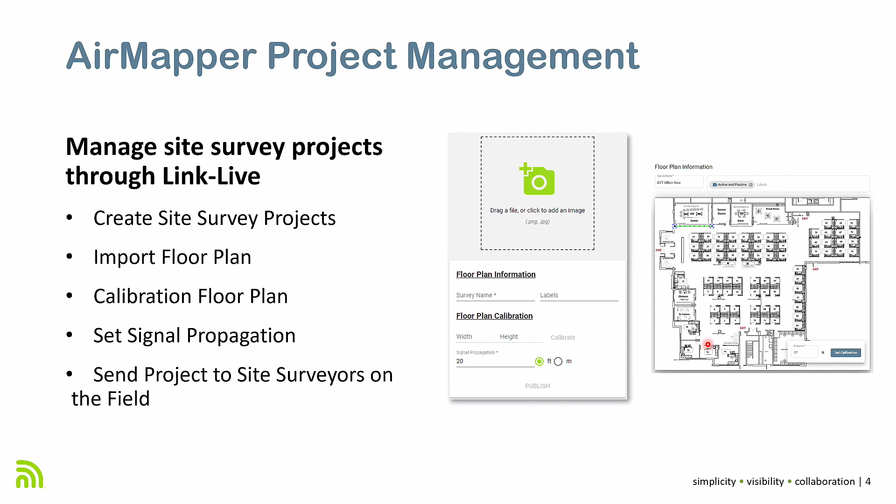The person on the field just needs to walk around and tap on the screen. So we've simplified that workflow to make it easier for everyone to collaborate. I'll show you how this looks in a few moments and how it works.

Another thing we introduced more recently, and I think some of you may already know about it, is that on May 12th we introduced the first integrated Bluetooth/BLE site survey solution on the EtherScope. So now, not only can you do active or passive Wi-Fi site surveys with your EtherScope NXG, which has two Wi-Fi radios, you can also do a Bluetooth or BLE site survey in parallel or at the same time.

The way it works is pretty straightforward, guys. Just turn on the Bluetooth radio on your EtherScope, and I'll show you how to do that in a few moments during the live demo. The idea is that now in parallel, where you're doing your Wi-Fi active, Wi-Fi passive, or a dual survey with both radios at the same time, you can also perform a Bluetooth or BLE site survey. The process is very similar, basically identical to what you'd do with the Wi-Fi site survey, but of course instead of collecting Wi-Fi data, you're collecting Bluetooth data.

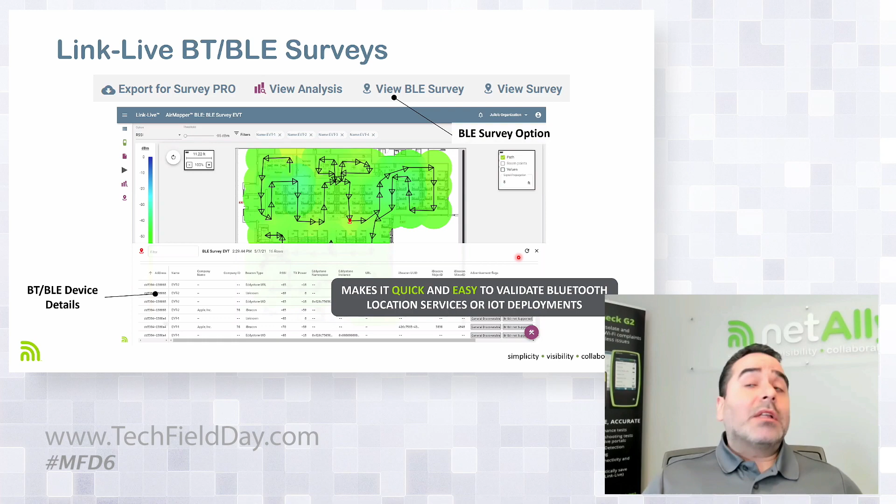The idea is to do more on the same walkthrough. Then you upload that data to Link Live, and I'll show you how that looks to do your analysis. It will be very similar to what you'd do with a Wi-Fi site survey. You have multiple filtering options, and you'll be able to see details about all the BLE or Bluetooth devices in the area. Notice that one of the bigger differences is that instead of Wi-Fi information, you'll see Bluetooth information.

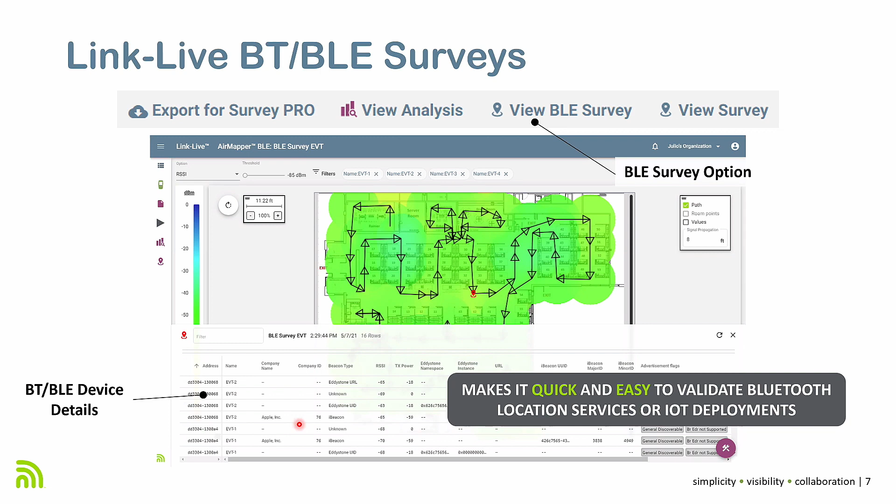All that is cool, and I know you guys will be like, okay, that's all nice stuff, stuff that was introduced a couple of months ago. But what's next? What's the new stuff that got introduced like yesterday?

Well, there's a few enhancements that we introduced, mostly on the Link Live side of things for AirMapper. As I mentioned, this was just introduced yesterday, so you can log in right now. Well, maybe not right now, I'm hoping you're paying attention to this session. But after this session, you can log in and check them out. Basically, we've done a few things.

Number one, we improved the performance of generating both heat maps and reports. As more people started using Link Live to generate heat maps from their AirMapper site surveys, we noticed that it wasn't only small projects with a few data points.

There were sometimes these giant warehouses with thousands of data points, and generating the heat maps may not have been the fastest. So we paid attention to what our customers asked, and we've improved the performance of generating heat maps. If I remember correctly, it's about 3 times faster than it used to be, and over time we'll continue to make more improvements to that.

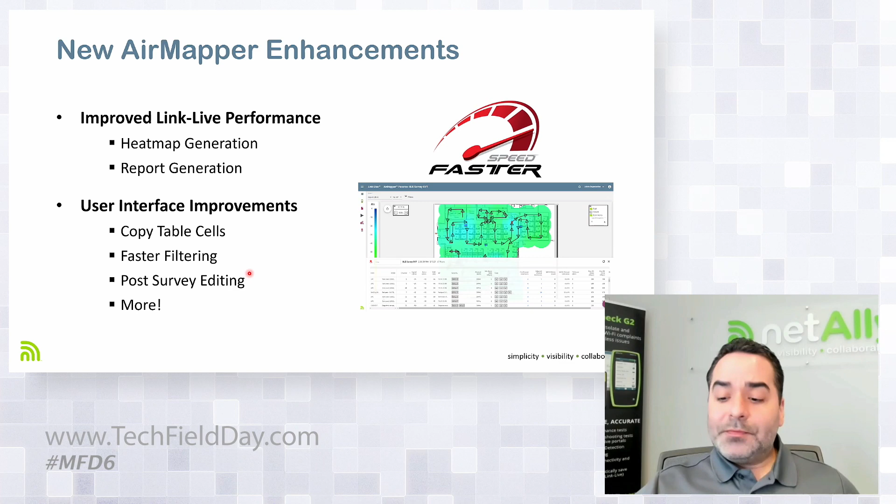And talking about demo, it's about that time. So instead of going through a lot of slideware, let's do the live thing and see how it really looks. Okay, let's start on the screen here.

I'm sure all of you are familiar with this part. This is Link Live. This is where you will do your analysis for the site survey data and where you can create new site survey projects. Let me show you how to create a new survey project, to make it pretty simple.

First, from the AirMapper section on the left side of the screen, go to the lower right and you'll see a little purple icon with a plus sign. Just click on it. From here, the first option is to manage floor plans, which will take you to a section where you can create a new survey. So if I go to the lower right to create a new floor plan...

Then in here I can do, for example, something like that. And I can add a label if I wanted to make it easier to find. Then I can just drag and drop a floor plan, let's say something like this.

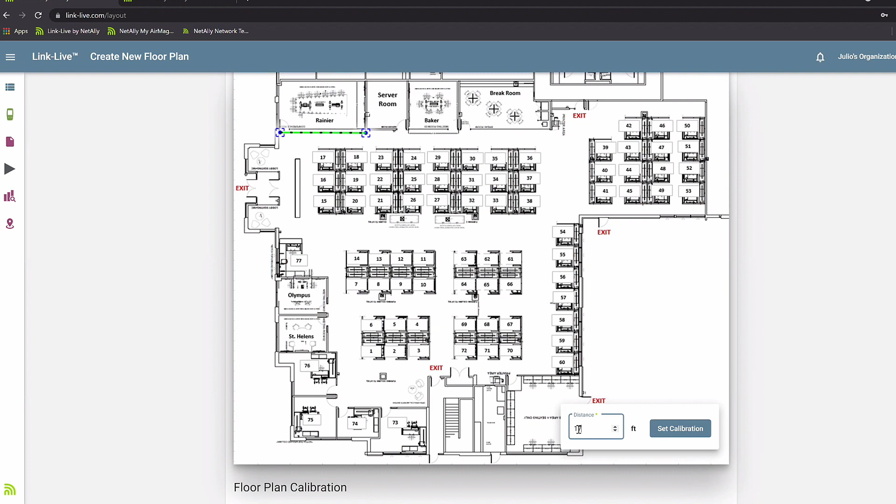So now I have my floor plan here, and I want to calibrate it. Notice that if you know the width and height, you can just enter those, but for most people it's easier to just do the calibration. Let's say I know the distance from here to around here—let's try again, there you go. Then I know that this is about 17 feet, if I remember correctly. Do a set calibration, and now I have my width and height.

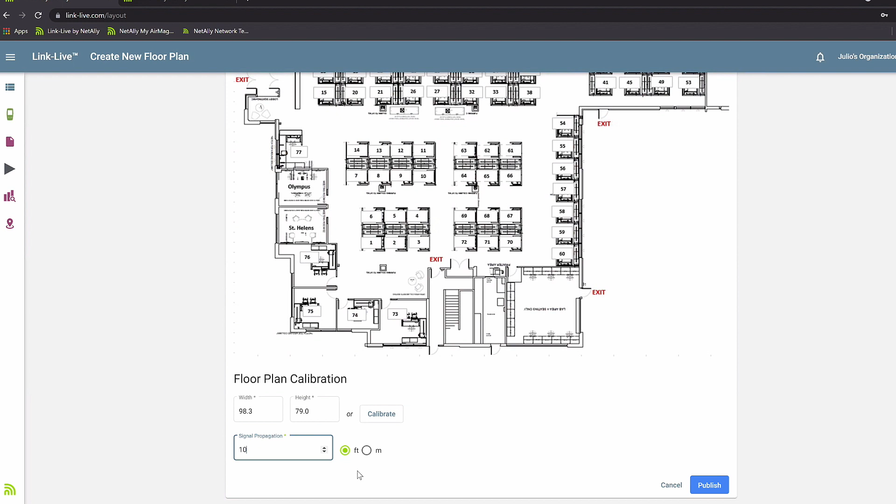As for signal propagation, as you guys know, this is very important to accurately perform a survey. Let's say for this case I want to use 10 feet—of course you can change between feet and meters, and in this case I'll leave it as feet. Then do publish.

And now, when you go back, what are the options on the map, sir? What files can you take for your maps—is it just PNG? Currently PNG and JPEG.

I'm sorry, did you say drawing files? Yep, so let's go. PNG and JPEG.

Any plans on adding CAD support or anything like it? That's a great question. We are always adding new formats, and CAD is one of those that we plan to add in the future. Thank you. Yeah, sure, no problem. Great question.

Now that your project has been created, you'll see it here on the list of site survey projects. And you have the option of sending it to multiple units or all your units.

For example, let's say that you have this big warehouse. Sure, you could do a site survey by yourself, but it may take a few days. So instead of doing that, you have like 3 coworkers with you, and each one will do a section of the warehouse. You can send the same project to all their units or specific units if you have more, and each one can go and do a section of the warehouse. Then when they're done, upload those results back, and you can merge them into a single project.

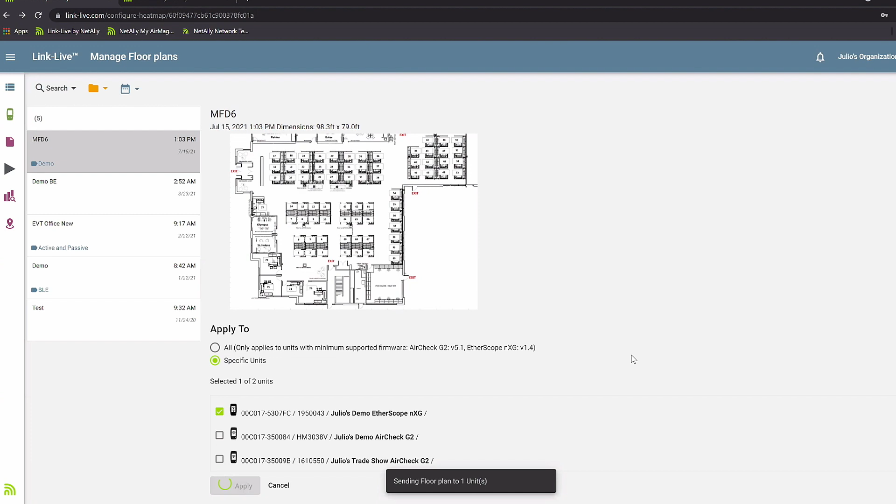Yeah, I've got a quick question. Yeah, sure. Obviously, at the moment, this is just a single floor. Are there any plans to have buildings with multiple floors?

Good question. So we get that request a lot. Currently, you can do that through the AirMagnet software. You could, for example, download your AirMapper project and open it on AirMagnet and use the multi-floor functionality there. As for the cloud, it is something I hope we'll be adding also in the future. So it's on the list as we make more and more enhancements to the cloud.

One thing some of you guys that have had experience with the AirMagnet software in the past may notice is that over time, almost on a monthly basis, we keep transferring little functionality that people are used to because of the AirMagnet software, and we'll be slowly making it to Link Live also. So as time goes, you'll see more of that functionality, like the multi-floor, making it to the cloud too.

Okie doke. So now that I already sent my project to my EtherScope, let's go to the EtherScope side of things. As you guys know, or may know, I'm using Link Live to remotely connect into my EtherScope.

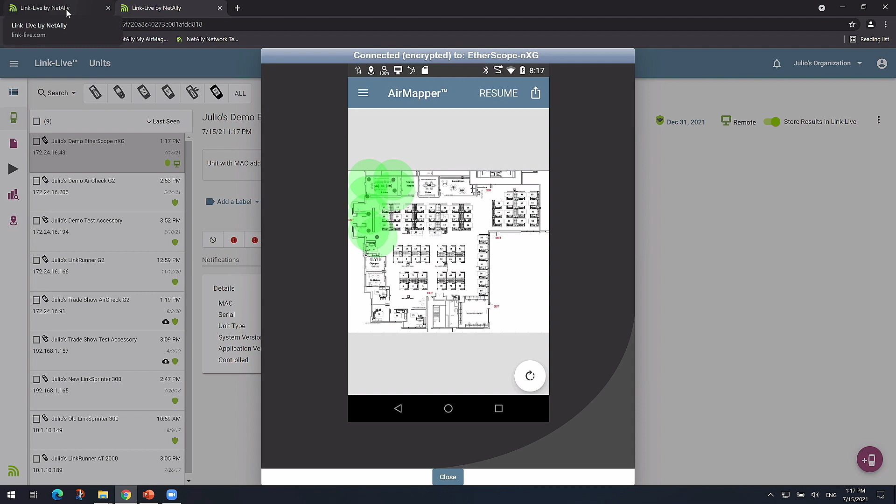Okie doke, so now that I uploaded this to Link Live, let's go back to Link Live. And again, I like highlighting this, but using the little tabs is pretty useful because you can have multiple screens going to Link Live. And if you have multiple monitors, you can have one tab on one monitor, another tab on another monitor, and it makes it easier to analyze data going back and forth.

So anyway, if I go back to my AirMapper screen, we'll see my project here. And this one doesn't have a lot of information, so I'll switch to this other project I got here that has more data. And from here, you have a few options - you have the option of just exporting.

Notice one difference for those that have been using AirMapper already: with the update we did yesterday, we basically changed the order of the options a little. We also clarified some of them. For example, in the past, instead of Wi-Fi survey, I think it just said survey by itself, and it was confusing because you had BLE survey and just survey. So now you have a BLE survey, Wi-Fi survey, and the option to export.

And notice the option to export can be used in two different ways: one, to export the data into AirMagnet Survey Pro to do analysis locally, or to export the data and share it with someone else. That's one of the cool things about Link Live being free and not being tied to support nor anything - if you have a customer who wants access to the project and wants to do their own analysis, maybe generate their own reports, instead of having them buy a software license to do analysis, or download a viewer, they just create a free Link Live account.

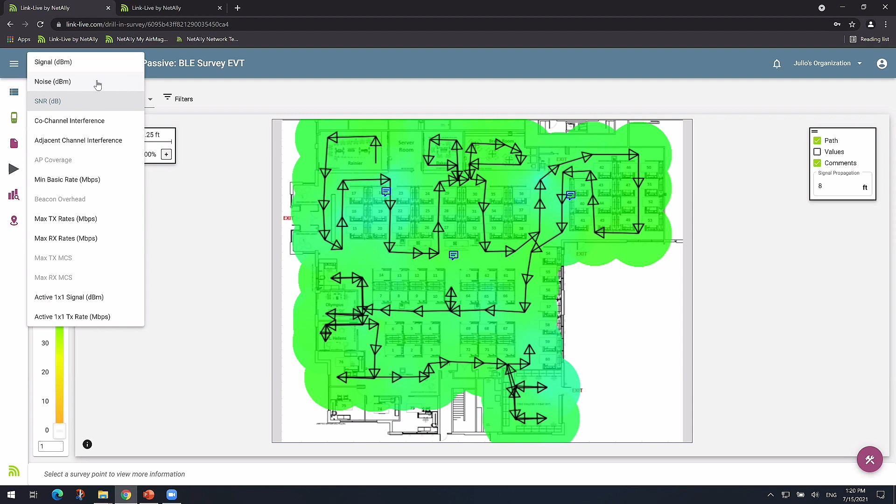How are you getting the SNR, sir? Are you assuming a static noise floor? No, we measure both the signal and the noise, and then calculate the SNR. So you have the option of looking at signal, it's measured, and the noise levels, which are also measured. The Wi-Fi radio on the EtherScope is different from, for example, USB dongles or the Wi-Fi radio inside a laptop, it has the ability of measuring noise. We use that to calculate the SNR. So it's actual measured noise, not a predicted value or something like that.

Thank you. Sure, then going to some of the enhancements we've done. Basically, let's say I want to select that area there. Besides the UI looking a little better, like I mentioned earlier, you have the option of just copying and pasting. So if you want to copy the data on the table, you can do that.

You also have the option of moving things around. So let's say I care more about SNR than noise, I can swap options in there. Or let's say you want to keep the security information always available so you can see it, you can do something like this. Now when you go back and forth, that part won't move. They're like little things, but they make it easier to analyze or go through the data. A little customization options, you would say, that make it easier.

Also, notice, and we added this not so long ago, you have the option of just adding comments directly. You'll notice this little icon here, the little i, it tells you, hey, do control click to add new comments. So now if you wanted to add a new comment here, you can do that too. So not only can you add comments from the unit and then see those here, but you can also add comments here directly, or you can just edit the comment that was done in the field. So if you notice a typo and you're like, I don't want to show that on a report, you can edit and fix that comment, or you can just remove comments and delete them too if you want. Little things that make your life easier while analyzing the data.

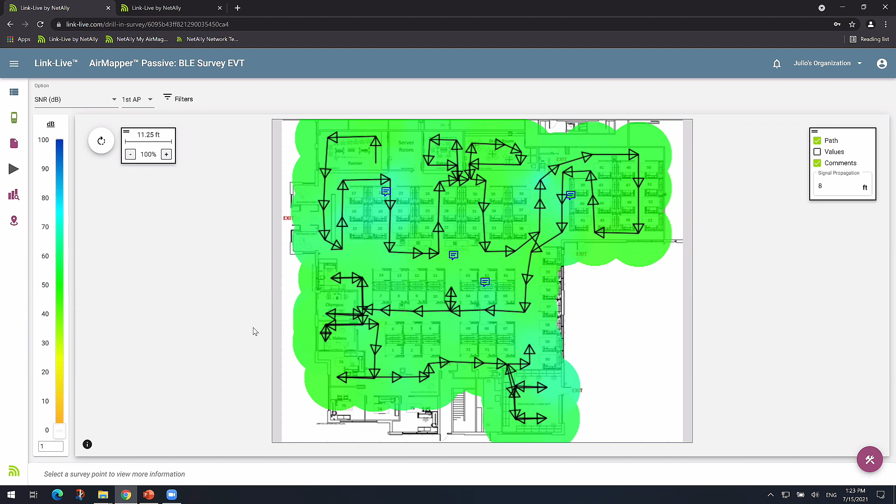Okay, moving on. So those are some of the enhancements we've done. Then the other part, of course, is the Bluetooth survey. So I did both my Wi-Fi active and passive, that will show up under the Wi-Fi survey data. Let's look at a better example here, this one. But at the same time, or in parallel, you can also do the Bluetooth survey.

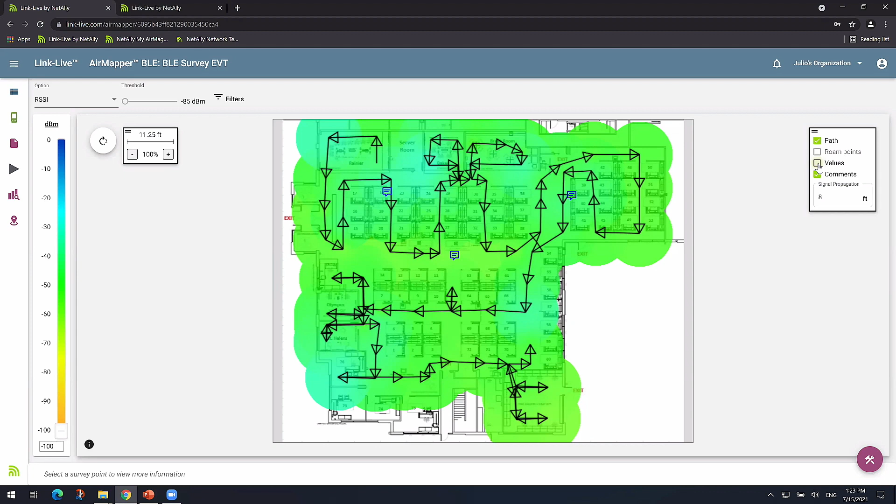When you look at it the first time, it looks very similar to a Wi-Fi survey. You have the option of looking at the path, adding comments, just highlighting the values. But then when you start looking at the details, you'll notice that the information included is not Wi-Fi related. For example, you'll see address information, or beacon names, you also see beacon types, for example Eddystone, which is what Android devices use, or you can see iBeacon. There are other types that will show up as unknown, but are also visible. So basically what we do is not only see that Bluetooth or BLE beacon in the air and measure the RSSI or the signal for it, but we also parse through that beacon and extract a lot of the data that's available on it.

And the importance here is that, let's say, for example, you're using Bluetooth or BLE beacons for location services. This may be better if I filter here. So let's filter pretty quickly and look at this. Let's say I only want to look at a couple of these, not that one, so I want to look at this one, this one, this one, and this one here. My mouse is getting a little crazy, so let's just use the tab here.

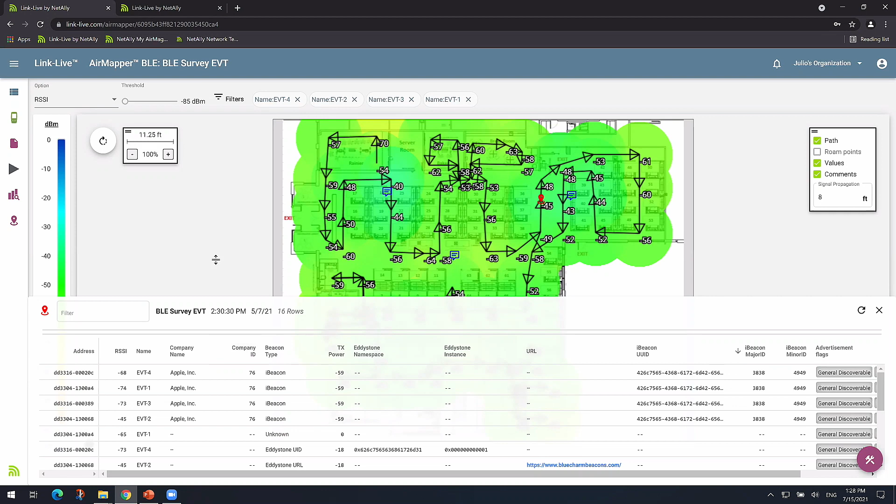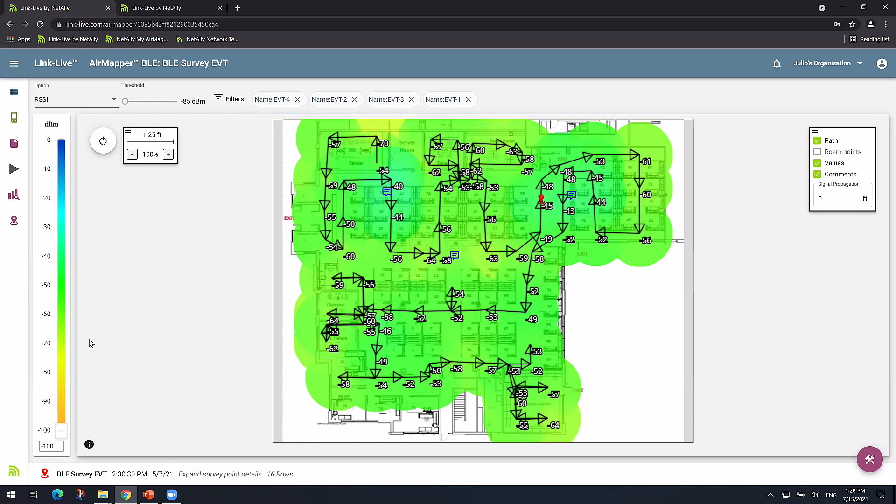Okie doke, so that's how the Bluetooth BLE part works, guys. You'll notice that if you wanted to find the location of the beacons, you can use the legend to gray out the weaker signals.

And just highlight the stronger ones, so you can see there's my 4 beacons in there, so you know where they are. Basically one on almost each corner of the building.

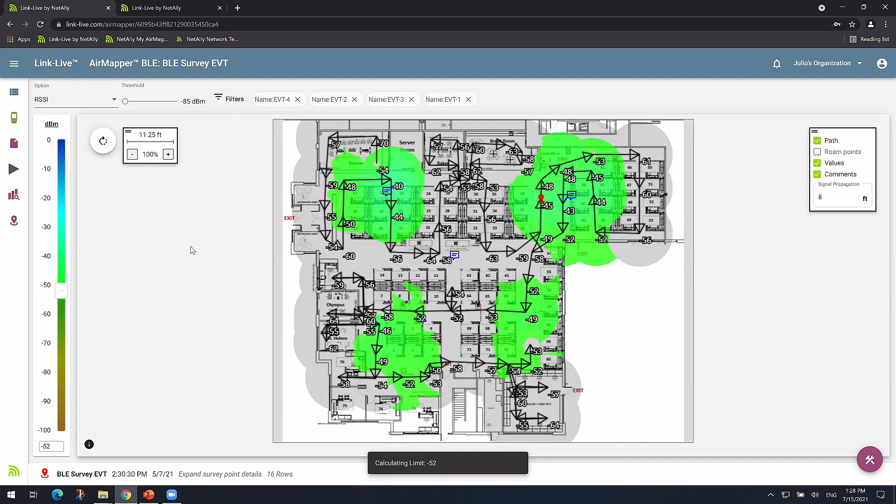So Julio, quick question for you on use cases. Would you see this feature being used by engineers that want to validate a new access point that is set up and has the BLE radios built in, or would you see this used more to locate client devices, making sure they're configured properly to operate with the system?

I would say all of the above. One, to validate the beacon or BLE configuration on the access points. If you're going to use those access points for location services, same as when you configure Wi-Fi, you want to validate it's been configured correctly, mostly with the location information. And if you're using other beacons to improve coverage on the site, then that's one use case.

Another use case could be for security: should there be any Bluetooth devices in this area, or should I only see X Bluetooth or BLE devices in the area? Am I detecting something that shouldn't be there, and where is it located at? Or you could also use it, as you mentioned, more for the client side of things and validate those. So technically there's multiple use cases, and if you guys come up with another idea, feel free to let us know. But basically, getting this type of visibility can be used in multiple ways.

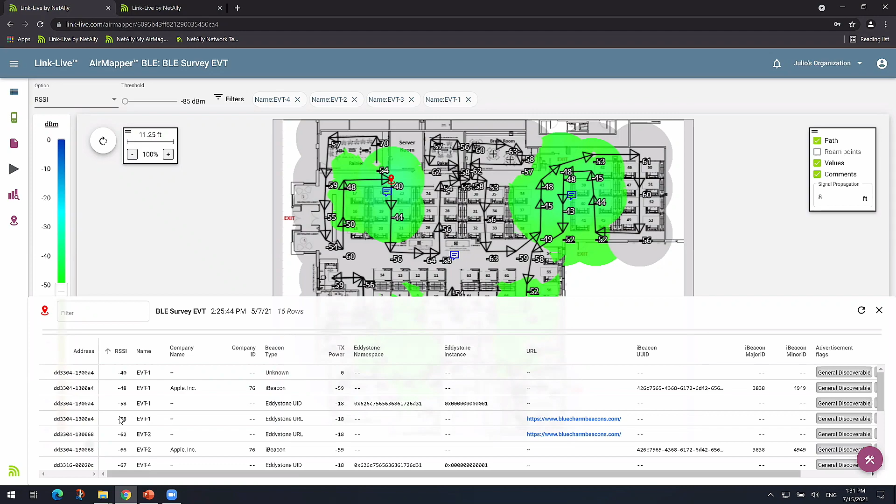I'm just wondering if you could heat map it, because let's say you're designing a BLE location system where you need to see at least 3 beacons from each location. You don't have to click every location, just see a map that shows grey where I haven't got 3, green when I have, or something like that. I'm just wondering if that's possible.

So let me see if I understood that. Can you repeat that again so I can think about it a little more? I guess what I'm getting is a heat map where I can see, let's say I have a requirement to be able to see 3 beacons in every location on the entire map. I want to know, is there any area where I can only see 2, or only 1? Because that'll affect my location.

Yeah, I see what you're saying. That's very similar to what we do on the Wi-Fi side. For example, on the Wi-Fi side, let's go back to my example and do that very quickly.

Let's say I want to look at this one here. Apply. So on the Wi-Fi side, you can select a specific SSID and then go to what we call AP coverage. This basically shows you how many APs that are part of that SSID you can see in a specific area. This is the worst of examples because I can see all 4 APs everywhere, so they have excessive power or coverage in this case. But you can mouse over and it'll show you how you can see 4 APs that are part of the SSID here.

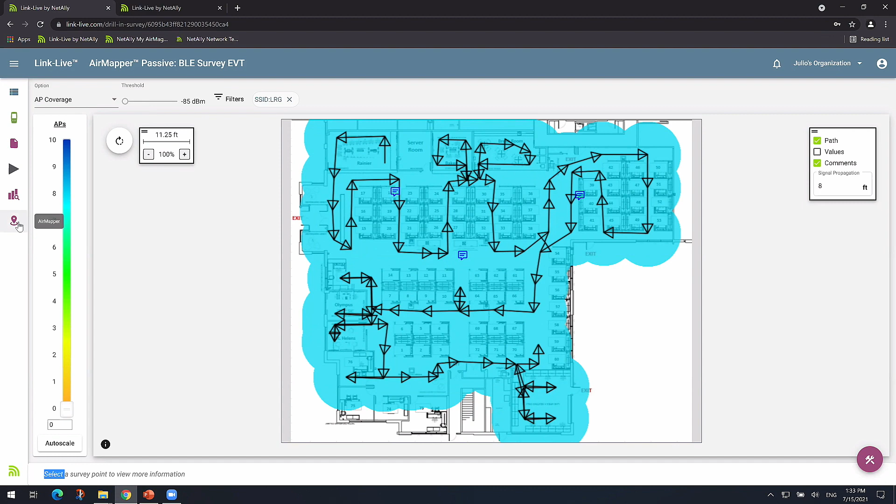So for the case of Bluetooth, go ahead, that's the idea, just with Bluetooth. In the case of Bluetooth, we don't have that option yet, but that's a great idea, and I think we'll add it to the list.

Julio, can you go back to that last screen you were just on when you showed the 4 APs? Yeah, let me do that. My question is, while you're there showing 4 APs, can you adjust the slider to see, say, 4 above negative 60? Yes, let's go back there. Here it is.

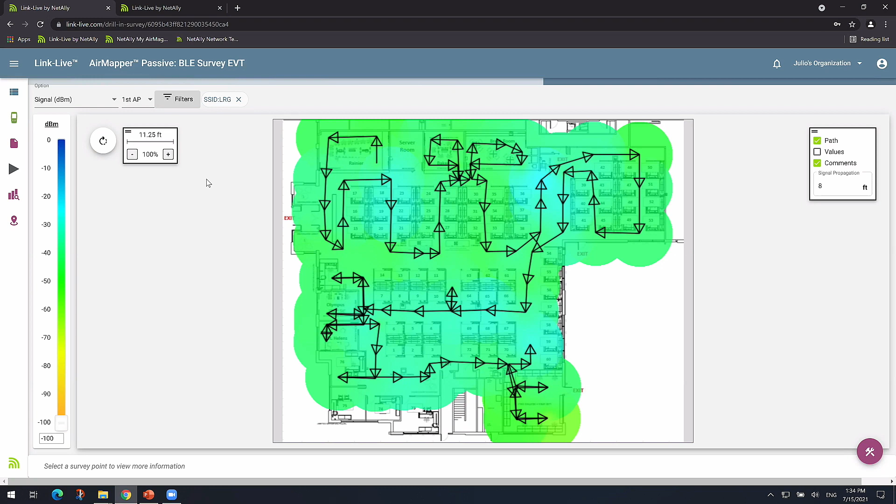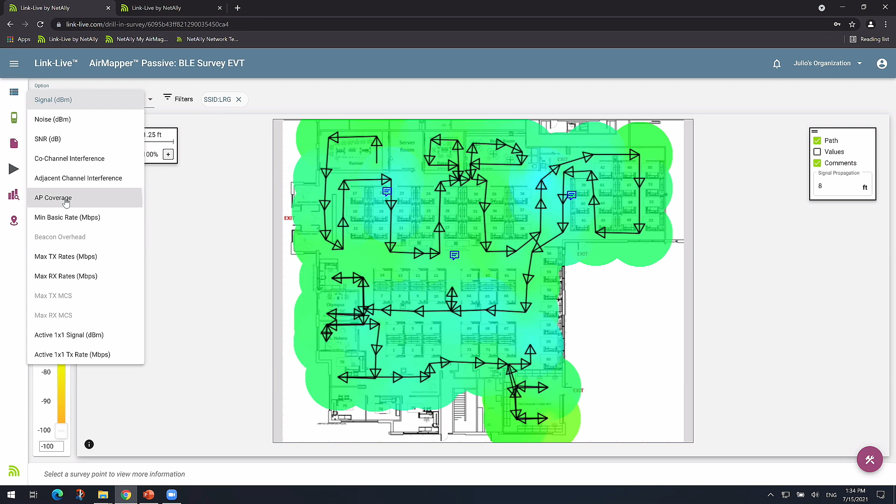Let's give it a moment. Oops, I'm on the wrong heat map, should be looking at AP coverage. Okie doke. So this one's showing count, but can you do count with that threshold? Yeah, that's a good point.

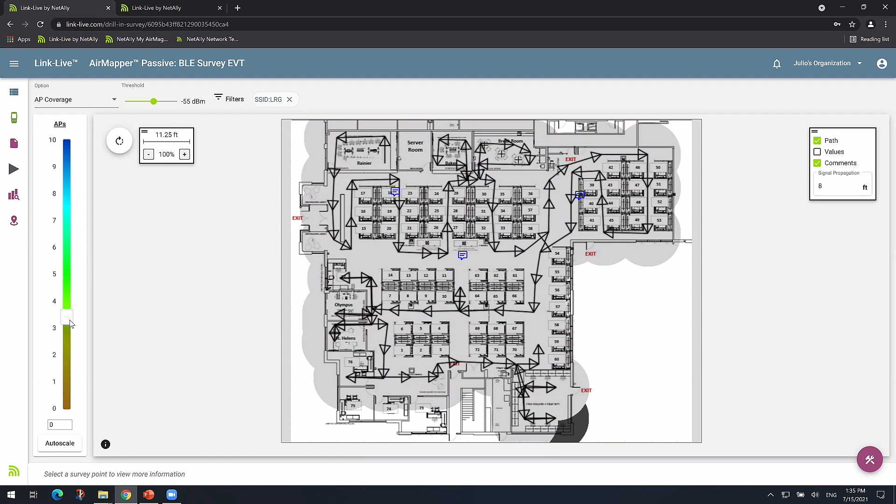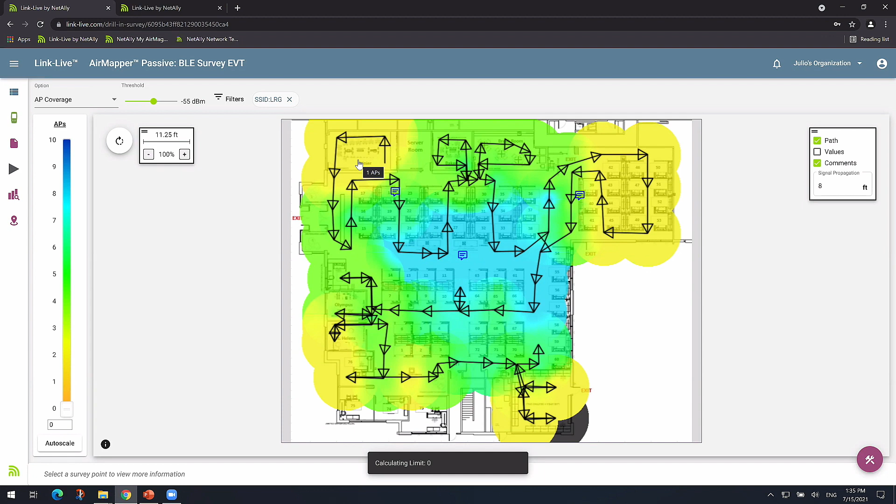So let's say you want to look at those that overlap, minus 55 as an example here. And let's change this. So yes, you can, now basically, for example, on this corner — just turn on values, turn on values and turn off path. Oh yeah, that will make it a little easier to see. There you go, turn off path. There you go.

So one thing you can see here, and that's a great question, Keith: if I look at only minus 55 dBm, I can see there's an area where only 1 AP is covering it at that signal strength or stronger. Then if I go to this area here, there's 2 APs covering that area at that strength. When I get closer to the middle of the building, since the APs are basically on each corner, I can see all 4 of them at that signal. So yeah, that was a good question.

Set the threshold down to 65 just real quick. There we go. As I mentioned, this is one of the worst case scenarios because it was very badly designed. You can see almost all 4 APs in every corner of the building, a little too much overlap, if you ask me.

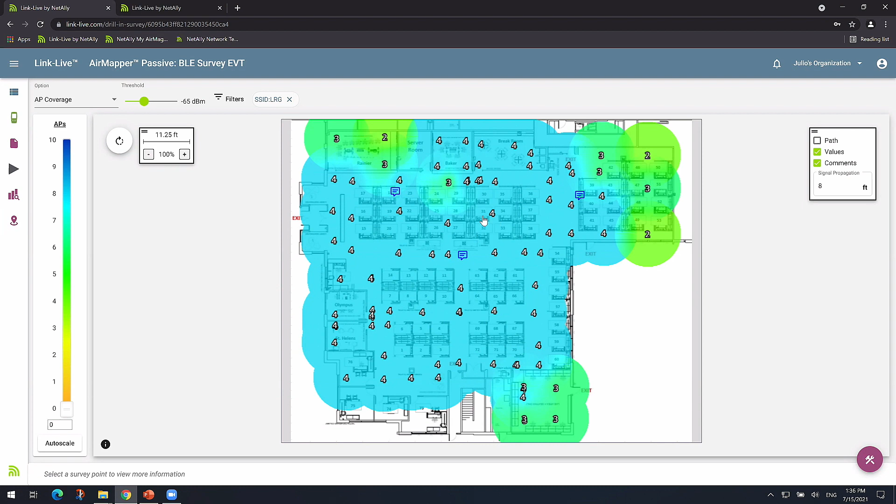But going back to the earlier question, it's a great idea to add that same functionality on the Bluetooth side of things, and I think that's something we could indeed consider.